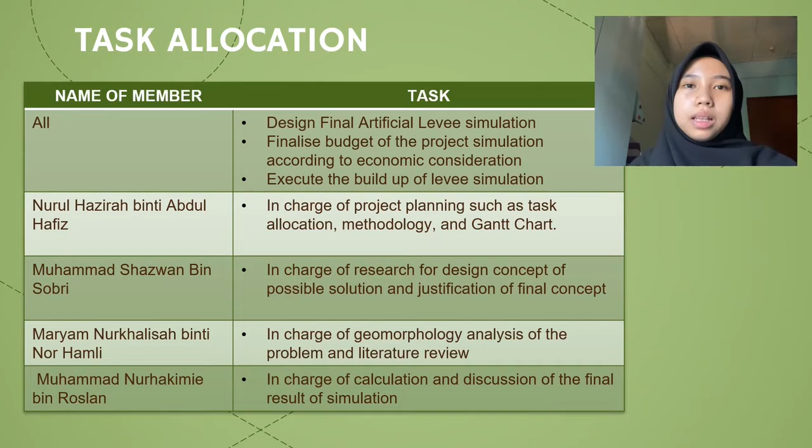Thus, all of the members are in charge of the design of the final artificial levee simulation, finalizing the budget of the project simulation according to our economic consideration, and executing the build-up of the simulation together. As group leader, I'm in charge of the project planning, such as task allocation, methodology, and also Gantt chart. Muhammad Shazwan is in charge of research for design concept of possible solution and justification of final concept. Maryam Nurkhalisah is in charge of the geomorphology analysis of the problem and literature review. And lastly, Muhammad Nurhakimie is in charge of the calculation and discussion of the final result of the simulation.

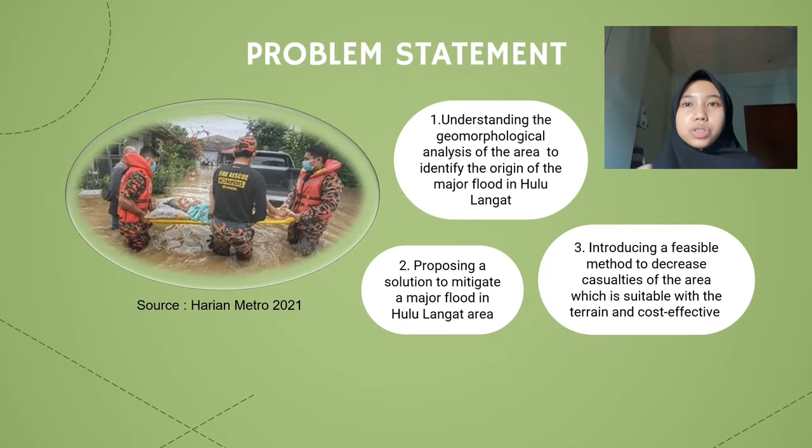Our problem statement includes understanding the geomorphological analysis of the area to identify the origin of the major flood in Hulu Langat, and thus proposing a solution to mitigate a major flood in Hulu Langat. And lastly, introducing a feasible method to decrease casualties of the area which is suitable with the terrain and cost effective. With that, we have come up with three main objectives as a focus for our project.

Firstly, is to understand the geomorphological structure of Hulu Langat by its stratigraphy, soil content, erosion, and also hydrology. Second is to lessen casualties affected at high-risk area nearby Langat River. And lastly is to propose a possible method with minimum cost to reduce the amount of flash flood.

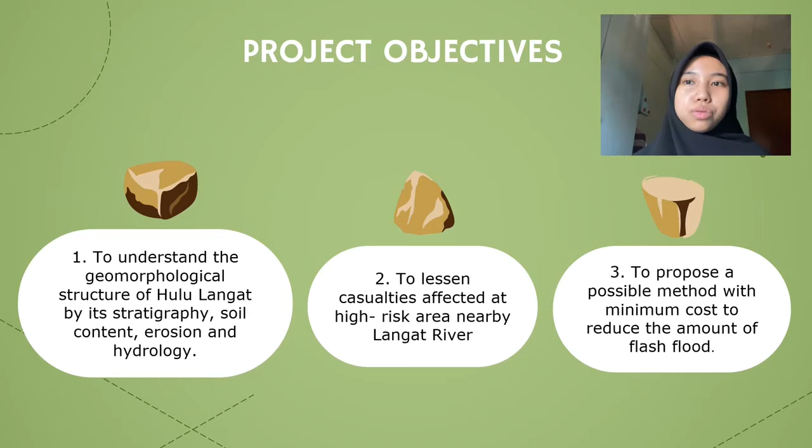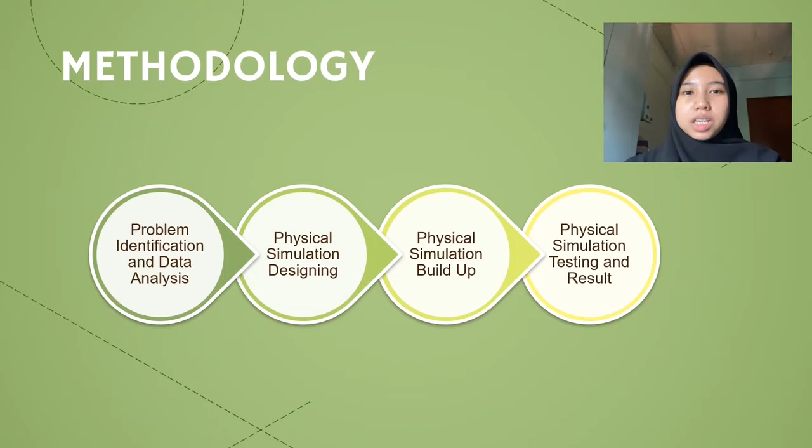Making sure that our project will run successfully, we came up with a methodology which started with problem identification and data analysis, physical simulation designing, physical simulation build-up of our artificial levee, and lastly physical simulation testing and result of our artificial levee. This testing will make sure and prove that our artificial levee can be used as the possible solution for the flash flood that happens in Hulu Langat. Next, I will pass to Maryam.

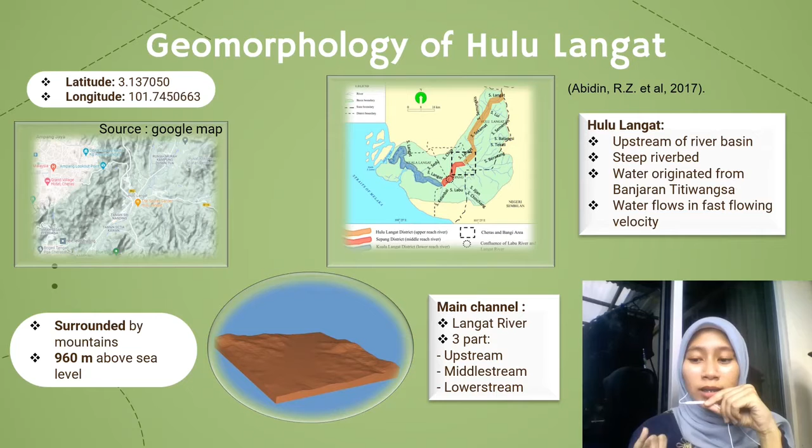On the right side picture we attach the main channel that impacts the hydrology of Hulu Langat, which is the Langat River. The Langat River basin can be divided into three parts: upstream, midstream, and downstream according to the color. Hulu Langat is located upstream of the river basin, the yellow color, where the riverbed is steep and water flows at high velocity.

In 2017, Abidin et al. performed a study on the Langat River basin, finding that clay dominates the region in the river basin. Erosion tends to happen in areas dominated by clay because the rock has a high reactivity due to the surface area to volume ratio. They also discovered several types of erosion, including sheet, rill, and gully type erosion.

This erosion has the potential to pollute the Langat River water with silt and chemical residue that have precipitated and accumulated in the river, where it also has the ability to change the flow of the waterway's direction and velocity. As a result, if Hulu Langat overflows, it will flood other nearby areas.

According to a 2017 case study by Saudi et al., the Langat River is controlled by monsoon equatorial conditions, with the climate of the river basin being uniform and feverish. Rainfall and humidity are also controlled by two monsoon seasons, the wet season from April to November and the dry season from January to March. This has an impact on Hulu Langat's hydrology and geomorphology, which explains why the area is hot and humid all year and also prone to soil erosion.

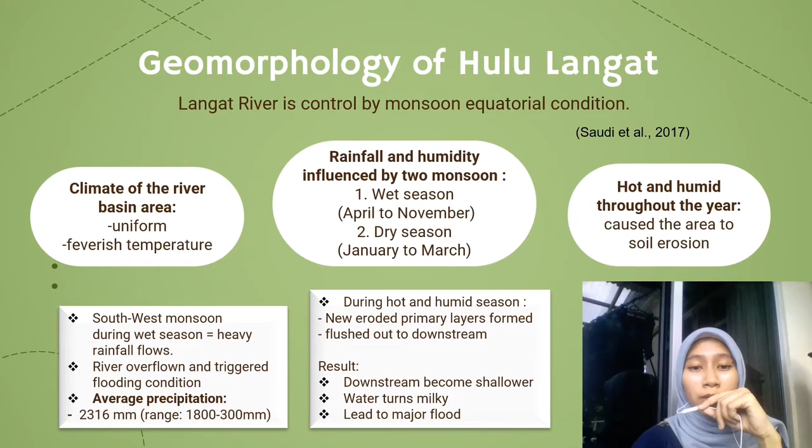Hulu Langat was also subjected to the southwest monsoon, which occurred throughout the rainy seasons and made the river overflow, causing the floods. The flooding occurs mostly after rains, when the fresh runoff erodes the primary layer built throughout the hot and humid season, then flushes it to the river where sedimentation and accumulation occur. As a result, the downstream area becomes shallower and the water turns milky, which contributed to the December flood disaster. In terms of Hulu Langat urbanization, it has switched from the agriculture to the industrial sector.

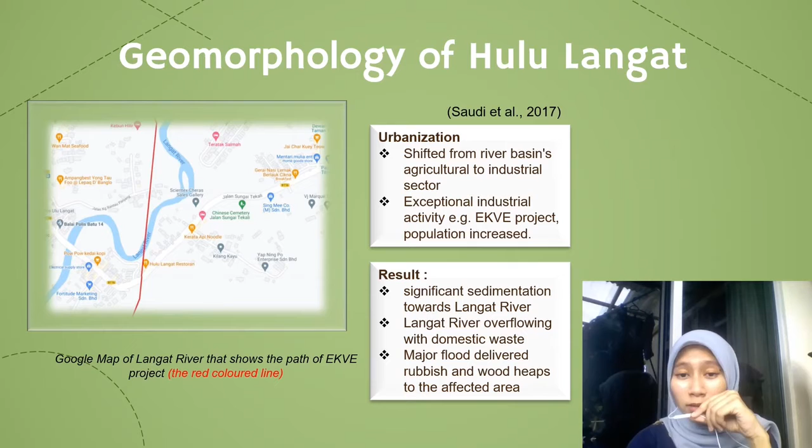Due to the unusual industrial activity such as the EKVE project, the population has grown, resulting in a higher rate of discharge from population area, leading to the severe sedimentation near the Langat River, which is now overflowing with domestic waste. Hence, the major flood last December brought garbage and wood piles to the affected area.

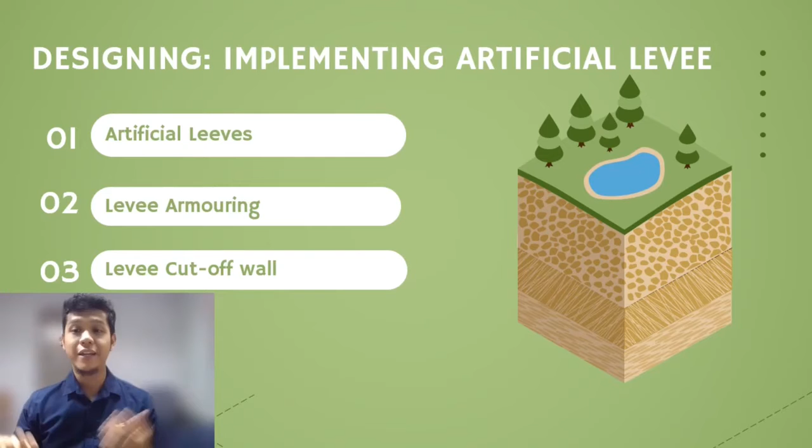And I will be talking about the design method. So our chosen design method is to implement levees at the Langat River such as levee armoring and levee cut-off wall. By implementing artificial levee, we can improvise the existing levee. Levee is used to keep the water in the river from overflowing its banks. We can also prevent strong water current from washing into undesired areas.

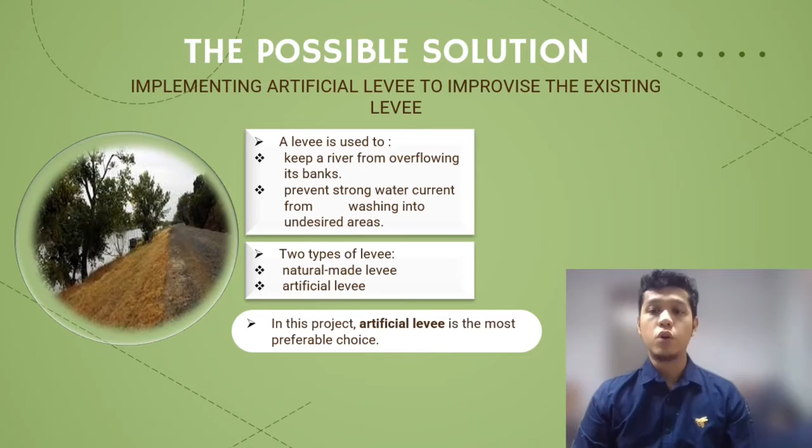There are two types of levees, which are natural levee and artificial levee. In this project, artificial levee is the most preferable choice. So you guys must be wondering why. Why is it so important to improvise the levee? So firstly, the surface area can be altered to make it more stable. Secondly, the slope can be increased to provide a better support. And lastly, the strength of the levee can be increased as we use better foundation material to make the levee.

So most people must be wondering what are the ways on how to improvise the levee. Well, the first way to improvise the levee is by using levee armoring, as it can make the levee less vulnerable to erosion. We use three types of materials, which are concrete, high density polyethylene mesh, and turf reinforcement mats. Briefly, these three materials have high resistance towards cracking, as it can withstand high pressure exerted on it. So levee armoring is very suitable for flash flood events where the water travels in a very high pressure.

Next is the levee cut-off walls. The reason why we apply this is to prevent the groundwater from entering more into the internal part of the levee. If lots of water enter the internal part, it will somehow increase the uplift pressure beneath the levee, which may lead to the levee being collapsed. Cut-off walls made of the mixture of cement and bentonite are placed in the middle of the levee. The mixture will act as a barrier as both materials have low permeability towards water.

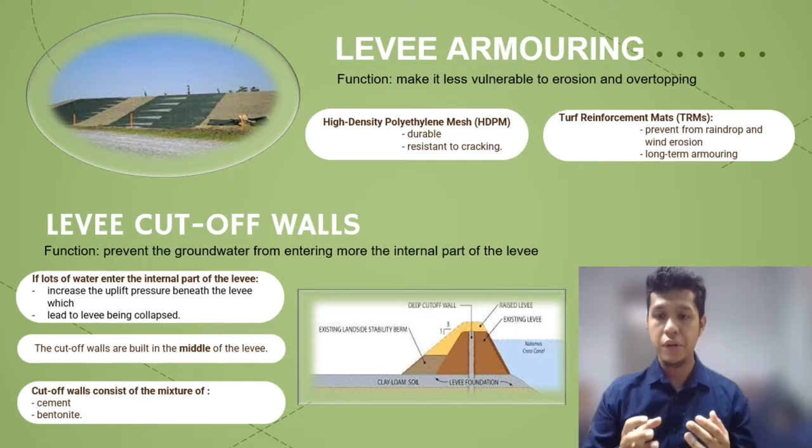So in this slide, this is our proposed structure of the levee. The base of the levee should be triple the height to provide a greater stability of the levee depending on the water level during the flood in that one particular area. The cut-off walls are placed in the center of the levee and it penetrates down to 39 meters and has a thickness of 1.8 meter.

The side and top of the levee are covered with high-density polyethylene mesh and turf reinforcement mats. As for the third layer, and also acting as the most external layer, it is covered with cement to give more support to withstand the pressure.

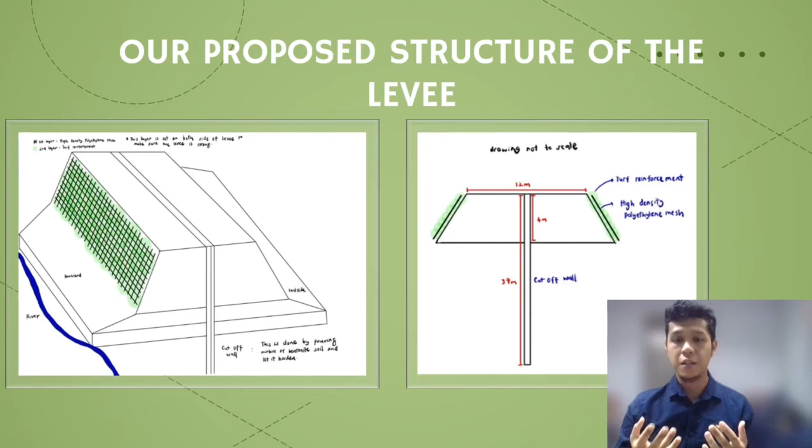Its texture becomes spongy and more watery as it absorbs the water, which shows in water level declination from 2.5 cm to 2.0 cm. This 0.5 cm declination shows that 400 cubic centimeters of water has been absorbed into the natural levee, which shows that more volume of water was absorbed compared to the artificial levee. It was measured that there was a slight drop in water level in artificial levee, which is 0.1 centimeter or equals to 40 cubic centimeters.

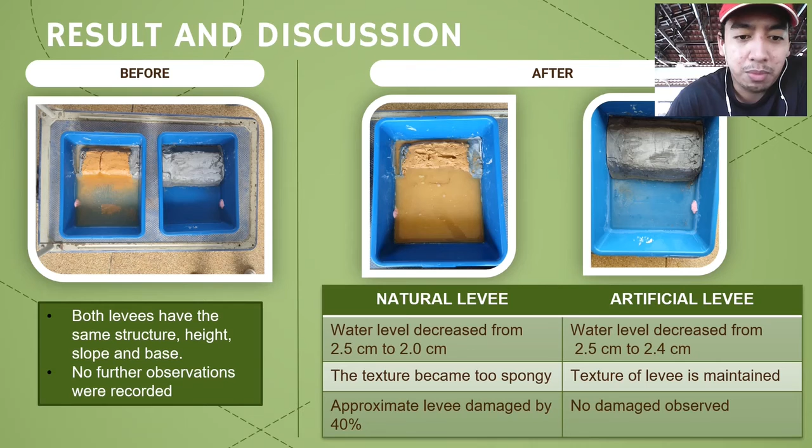After measuring the levee in 3 dimensions, it was calculated that the natural levee has been damaged for around 40%, which 652.964 cubic centimeters has been destroyed from 1,632.41 cubic centimeters. Meanwhile, in artificial levee, no damage was observed.

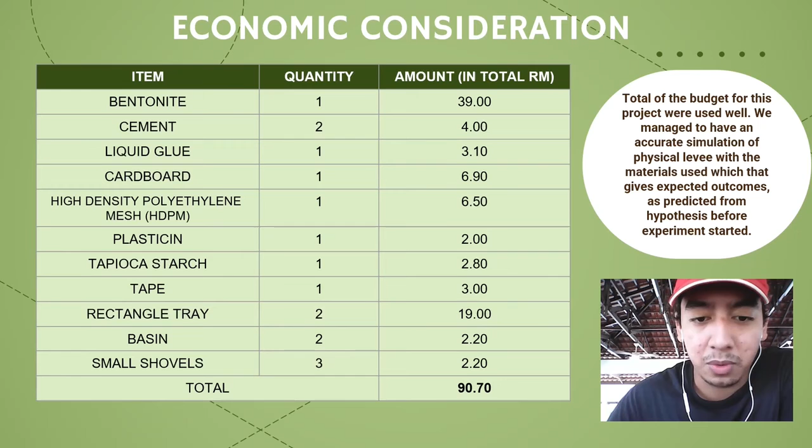Moving on to the economic consideration part, this is the overall budget allocated to run this project. There were several new items added into the budget list, and the overall total for the budget differs a bit from the proposed budget. Summarizing on this slide, the total budget has been used well, which gives the expected outcome from the hypothesis.

As for the conclusion from our project, we think that implementing artificial levee is important at Hulu Langat because of 4 reasons. The first, there were existing levees at the Langat River which collapsed due to construction of the EKVE highway. The second is the area predominantly consists of clay, as clay is suitable to be used to build the levee. Thirdly, the materials used are significantly great to provide resistance to high pressure. And for the last, the height, the base, and the slope can be altered to give a better stability for the artificial levee.

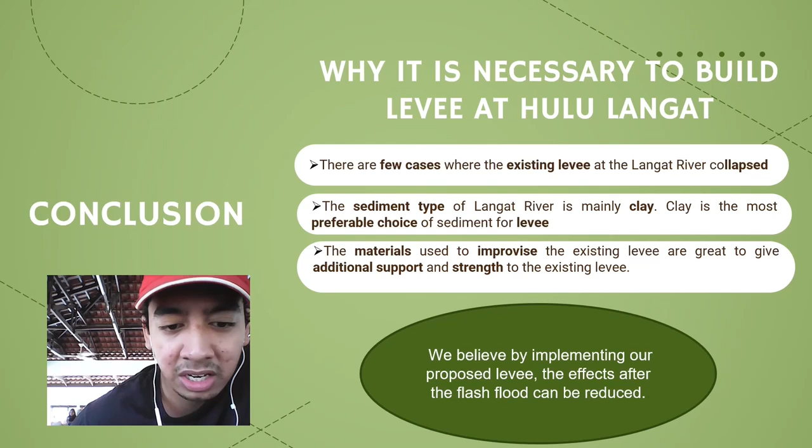For the conclusion, based on our explanation on our proposed levee, we believe by implementing our proposed levee, the consequences after the flash flood can be somehow reduced.